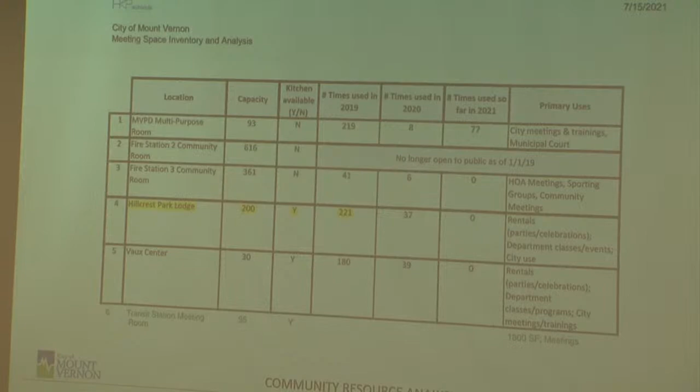We also wanted to make sure we took a look at other kinds of community space that already exists in the city and make sure that we're not duplicating, but really offering another size space. And this will actually be 3 spaces. There's 2 individual rooms and then one that opens up to each other, with a goal of trying to seat 200 people for a luncheon or dinner, and then the ability to have some overflow space out into a commons area, so it could even grow from there. So really the closest thing right now is Hillcrest Park Lodge at about 200. The transit station is 95, so it's about half the size that we're talking about. So it just gives you an idea of the spaces that exist and making sure that we've got something that's new and different and is going to meet the needs of the community. Plus it's bringing them downtown where we really want activity to happen.

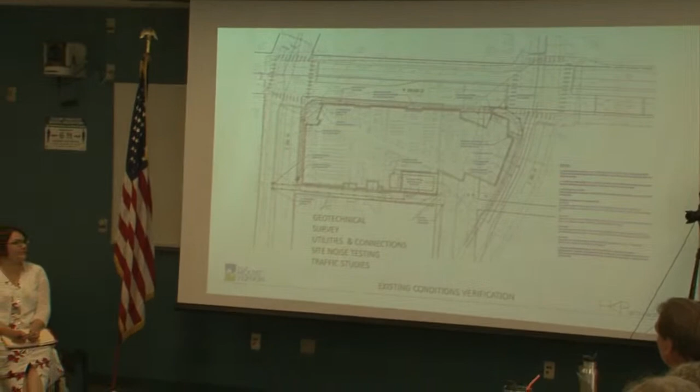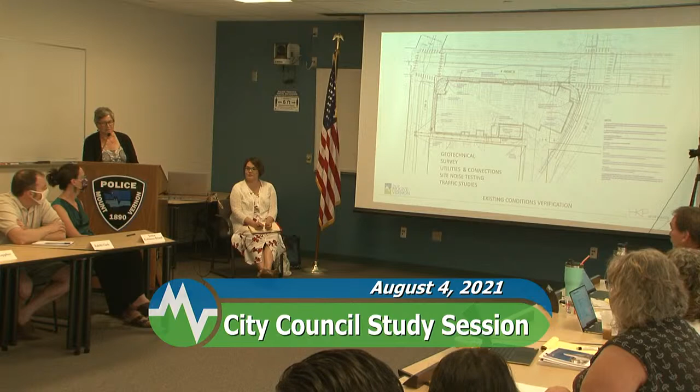We also started with a lot of existing conditions verification. So looking at all of the utilities that are on site. The geotechnical report, we just got the first draft of that. They did their work. We've got a survey as of a couple days ago. They've completed all of their work to date. And we actually even did a site noise test to kind of get a baseline of what the noise is in that area, so that we can look at our envelope and make sure that we're trying to reduce as much noise inside to outside. And we've been working with TSI and the city staff to go and make sure that the way we're envisioning the vehicular and pedestrian circulation around the building is conducive to the site and also all of the other planning that's been done in the sub-area plan.

We've also been looking at the site context. We happen to have a model of the courthouse and Skagit admin building from back in the day when that was completed, so we have a really easy scale model to put this new building next to and start to think about its mass and size and how we can break that down and make it fit within the context. It's not easy because we're really limited in size of sites, so we are pushing the boundaries, but looking at ways to make that happen.

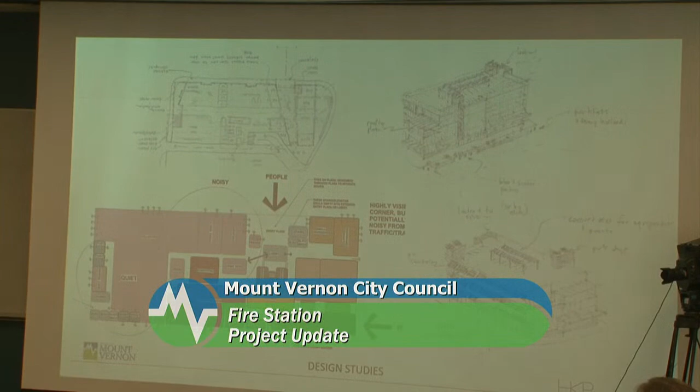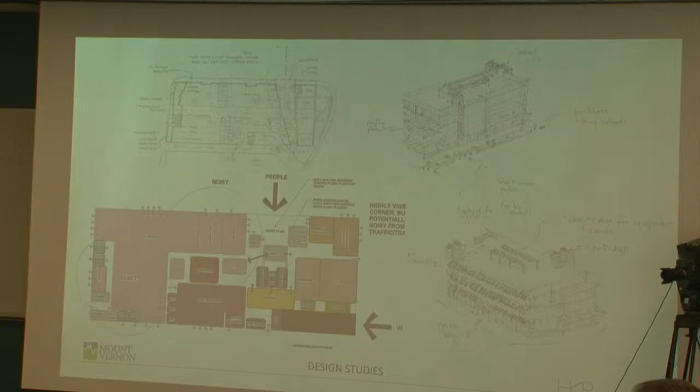We just started with early design studies, looking at plan options, elevational options, adjacency diagrams, and all of those kinds of things, and working with our entire consultant team to provide a plan that was going to work.

So on the 19th of July, we submitted our 50% schematic design set to the city. This was really the first opportunity to get ink on paper, a plan that people could react to, and all of the other consultants working off that plan to look at lighting and power, fire sprinkler, structural, civil—everybody had their own package in this, including wayfinding and signage, and even down to the furniture, preliminary furniture counts.

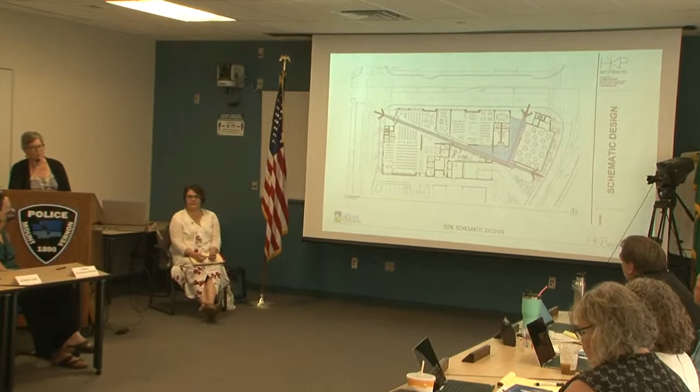The plan presented in this schematic design set was really based around looking at how people flow, pedestrians primarily, into this building from 3 primary sides, and trying to create a circulation pattern inside the building that makes sense. So once you get in the building, it's clear where you are and where the opportunities are for you to move, and to really take advantage of the combination space in the middle as the knuckle that serves a lot of different functions.

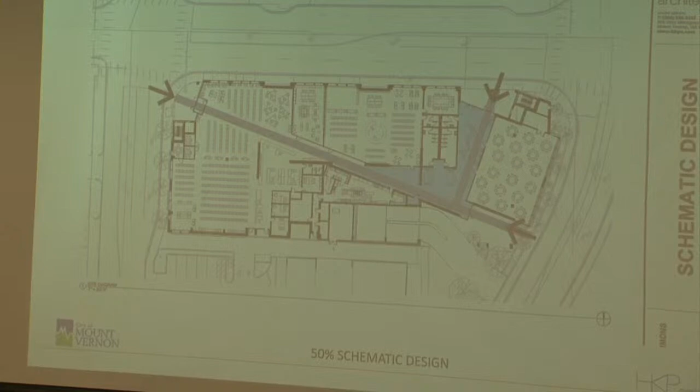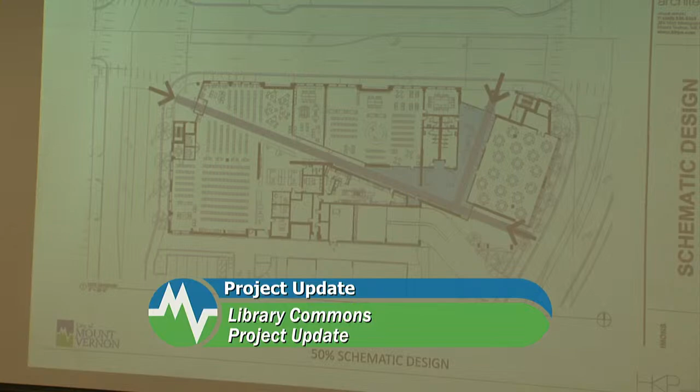I think this space, people may look at it and say it looks like wasted circulation space, but that space, I think, for us is a highly programmed area that will be utilized an awful lot, and we can get into some of those details in a bit. But conceptually, we've got the library on the left-hand side, community center on the right, and we wanted to develop a real clear circulation pattern through the building.

In terms of the site relationships, the one thing we really wanted to focus on was the safest, quickest, and most effective way to get people off the street and out of their cars. So we looked at a pattern where the cars turn onto 3rd primarily, or come up 3rd, and enter the building from the alley off of 3rd. We really want to get them off the street and not come around and cross over multiple pedestrian paths.

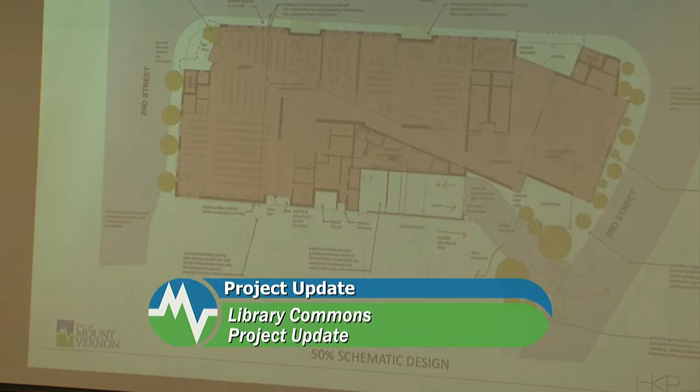Also, we wanted it to be clear—you'll be able to see this really from I-5, so the minute you get off the exit, you'll know exactly where to go, and we won't need to rely on a lot of signage. It'll be quite evident. So that entryway is being studied along with the alley, which we do need for a lot of servicing of the building, and also to maintain all of the property access for the properties to the south, as well as recycling, waste, deliveries, and all those kinds of things.

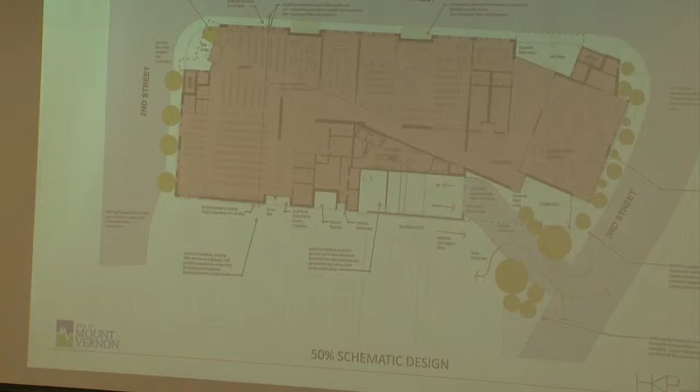We're also trying to pack some landscaping onto the site. It's pretty tight, but we're creating some spaces, and though it's not shown here, there'll be street trees along Kincaid Street, trying to make that the gateway to the waterfront, and soften the building edge to have a nice, pleasant building environment on all 4 sides, even the alley.

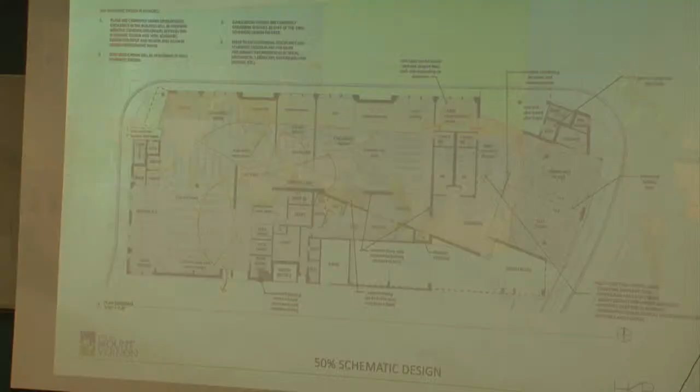The interior plan is really focused on sight lines and visibility and being able to supervise the library spaces as well as the community center. So we looked at, even though we have large shear walls that come down all the way through the parking garage and can't really move, we're trying to find those spaces where we can set staff up so that they have maximum supervision of all of the spaces and not have to rely on cameras or things like that.

Similarly with the community space, there's an option or a space for a staff person to sit in the commons area, but we don't want to dedicate an entire office or dedicated space out there that may not be staffed all the time. Instead, we want a designated space for them, a furniture solution that works and can be flexible, which people could also use as a bar or informational area for different events when they get set up in that space.

So we've got the restrooms here centrally located. The kitchen, I don't have a pointer with me, I apologize, is down in the central lower area as a central space. And you'll see in a minute that we've shifted a few of these things around.

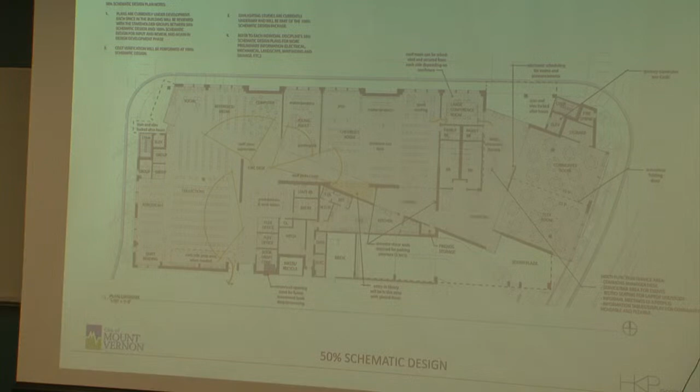Primarily, the idea was to also introduce as much natural daylight as possible, and you can see most of the walls go north-south, so that we can drive light down as far as we can into the building.

Another focus is looking at how to close the building down after hours. So either for the library, if the library wants to stay open but they don't want to have the community center open, or vice versa, how can we make sure the restrooms are available on either side for either function?

And then there's been some thought put around pandemic, coronavirus type of situations with entryways that are separated and different ways to deal with curbside pickup and sanitation of fixtures and things like that.

We have the 2 circulation towers at either side, similar to the previous study. Those are open to the public. They will be closed off with security gates, but they basically work outside of the building footprint. So people can come and go from the garage and then enter the building. They don't have to go through the building to get out to the sidewalk, but they can be closed for security purposes.

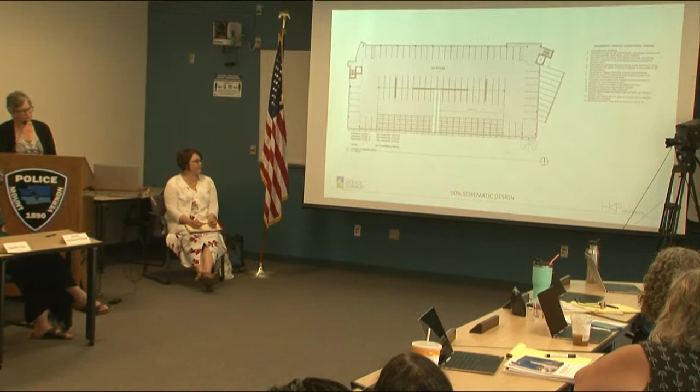And then the parking analysis has been very thorough. We've gone through a lot of different iterations, different sizes, different configurations, trying to optimize as much as possible. Right now, it's 277 parking stalls on the 3 floors. There is an ADA van stall and ADA regular parking on the 1st floor, up near the elevator on the west side, so there's lots of equity within the parking garage.

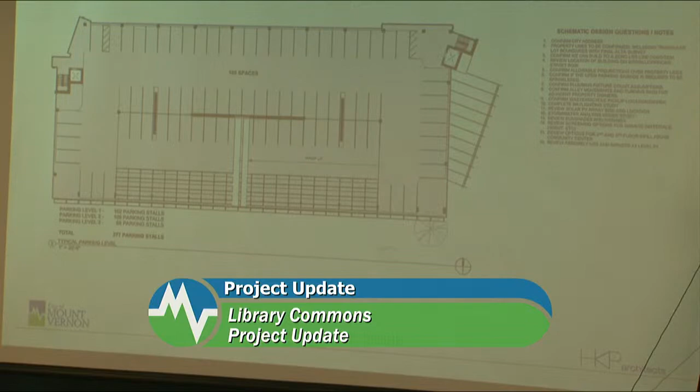There will be spaces for a minimum of 75 EV charging stations. There'll be some EV for electric bikes, and there'll be motorcycle parking. And the top floor maybe has the potential to have a little bit more compact parking if it's opened up for valet or permit spaces for people that live downtown. The beauty of that too is we could stripe it normally, and then monitor it and wouldn't have to restripe it necessarily. But if we know who the users are, we can have it more efficient up there than it is currently striped.

So we developed some very preliminary massing models that went along with this plan, trying to look at breaking the scale down a little bit, especially at the corners, and just starting to get into materiality and things like that.

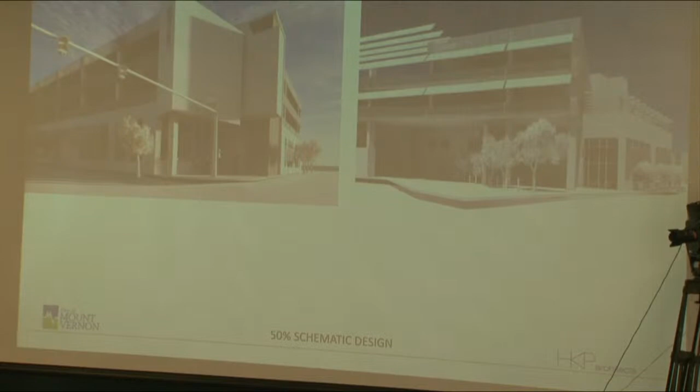Looking at PV panels on the south side, both on the elevation of the building and up on the parking garage floor, and making sure that we have clear marquees and signage for each of the entries. And then lots of visibility, not only for people to be able to see the activities going on inside, but for people inside to be able to see what's going on outside.

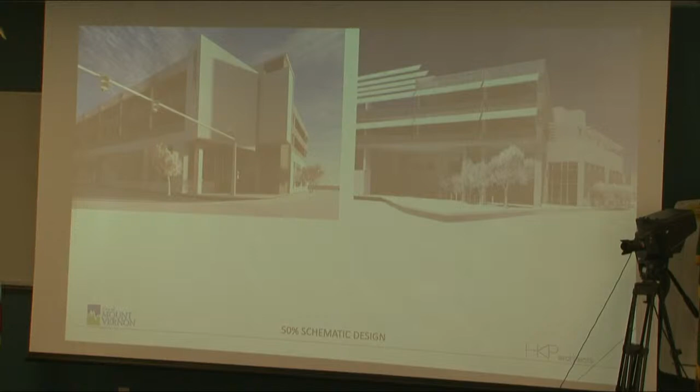Another thing we've been looking at are our sustainability targets, very important for this project. The first one is called the EUI, which is our energy use intensity. Down on the bottom, this is a chart that represents existing buildings. So for a library or public assembly, you would expect to see about a 67 for an EUI, which might be about what the existing library is, or maybe not quite as good with the glazing that's still single pane. I'm not sure if it's been changed out or not.

We are targeting 35, and code building is about 47. So we're trying to really drive down the EUI primarily by the use of a passive house envelope, which is a high-performance, highly insulated envelope that reduces a lot of heat gain and heat loss through the thermal envelope. It's one way it's really going to simplify our mechanical systems, make it more comfortable, more acoustically sound, and provide durability for the life of the building.

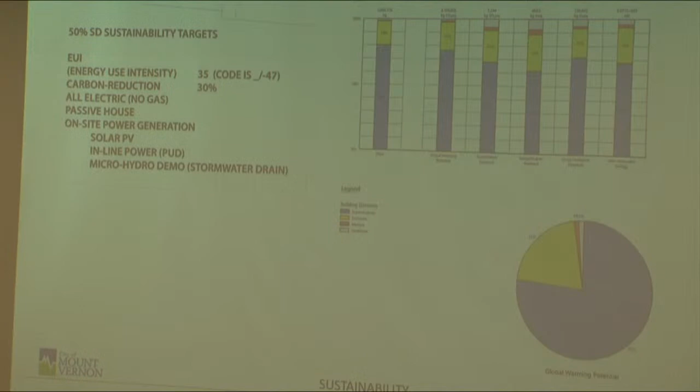The other thing we're looking at: the $2 million from the state came with a string attached, that it be LEED certified. We've put in a request that the LEED requirement be, exemption I think is the word, based on the fact that in our opinion we're going beyond LEED. Bill Bullock has been helping on this. We've got a meeting Friday morning with a person at DOC to talk about getting that exemption for the reason we're going beyond.

The important thing is that LEED costs money just to certify. It has nothing to do with what you buy, but it's going to cost $50,000 to $100,000 just to have us do all the documentation. I'd rather put that money in the building and do the things they want you to do for LEED. Hopefully that will be the case. If not, we can satisfy these pretty easily, and I don't have concerns that we can do this. It just takes time and money, and I'd rather put that time and effort into the building.

We've developed an FF&E budget, which is the furniture, fixtures, and equipment, with some preliminary things. This will all go into the soft cost numbers that will be combined with the first estimate I'll talk about. So we're counting up all the chairs, tables, and sofas and developing that cost with some plug numbers, and looking at all the other impact fees and other soft costs associated with the project.

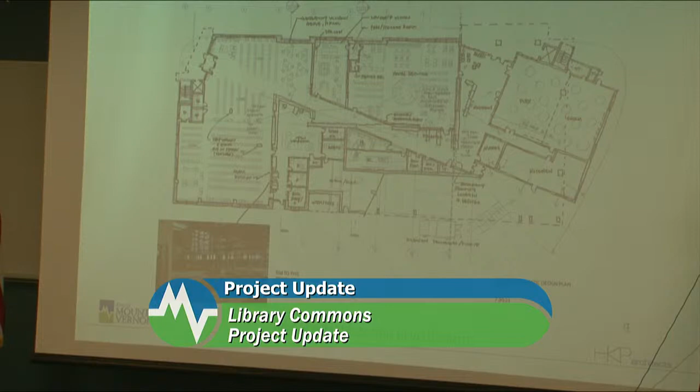From the 50% SD set, we received comments back from the mayor, city staff, library staff, and parks people, and we're in the process of revising the plan based on those comments. One thing you'll notice is the kitchen has moved down to the lower right-hand corner, where it can be visible from the street and have direct access from the south courtyard, putting eyes on that courtyard so we can supervise it. The restrooms have moved into the central area, a bit more adjacent to the library.

We're looking at rotating the conference area while still being able to provide for at least 200 people seated. The kitchen there also helps serve those rooms a lot easier.

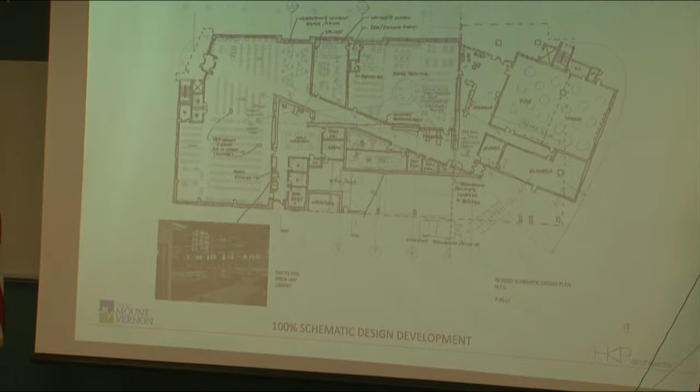There's more direct access. Julie, where's the restrooms? I'm not seeing it. Right, yeah, this whole bank here. Okay.

So there are some gender neutral family restrooms and the men's and women's restrooms there, and a little storage room for friends.

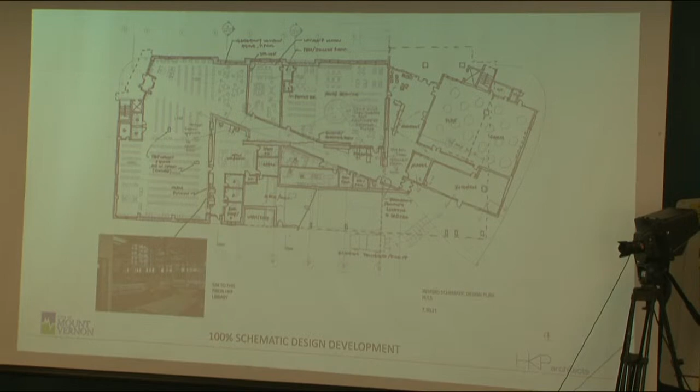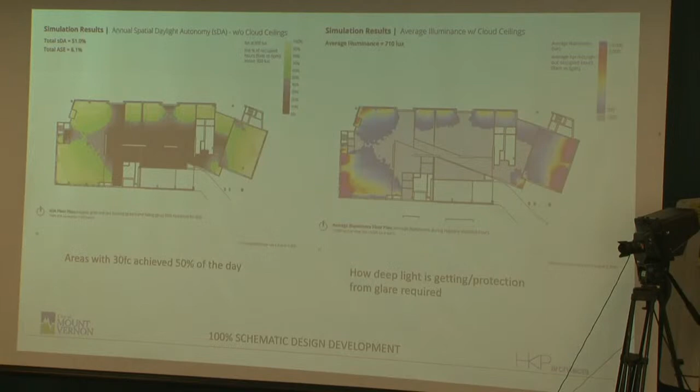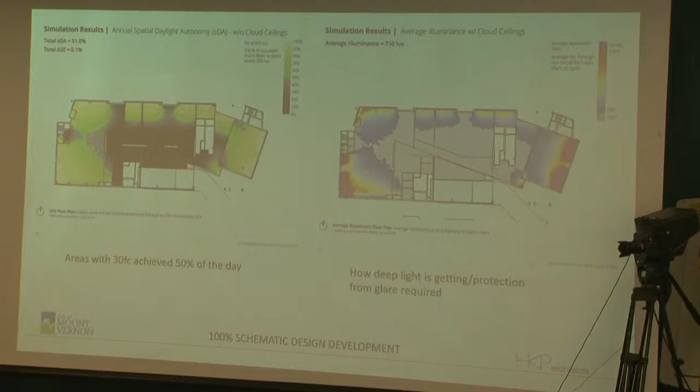We've also been doing daylighting studies with the Integrated Design Lab. This first chart shows where there's 30-foot candles of light achieved 50% of the day, just from natural light. It helps us look at where our walls are, where our rooms are, where we need to drive light. The next one looks at illuminance, the intensity of light, which helps us look at where we might want exterior shading and other ways of bringing in light in different areas. So we're really working three-dimensionally through the natural light patterns here.

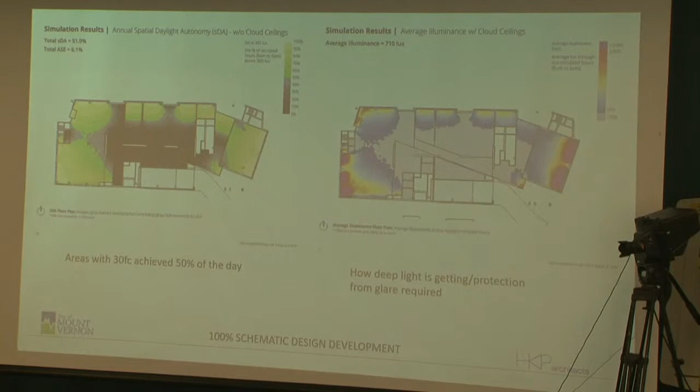So the model is developing. We're starting to look again at materiality, form, and how this feels on the street, and how it's going to feel to both pedestrians and people who are driving here for the first time.

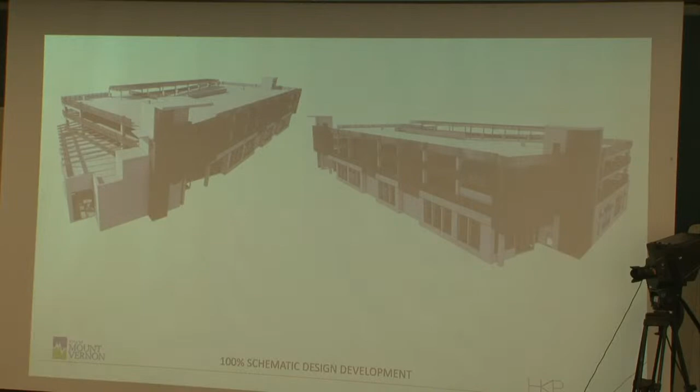The next deliverable for us is 100% schematic design on September 8th, and that will include the first round of costing.

I've also been working a bit with the city on funding, helping with some information on the RAISE grant that went in recently, which the mayor submitted. I've been tracking that along with the city, and at that next deliverable we'll have an update on the complete fundraising package to date. Related to that, we helped assist with a funding video that Brand Query did under our contract. This was geared towards two different audiences, the federal grant opportunities as well as local fundraising, so they'll be developing two different campaigns to help raise money for the project.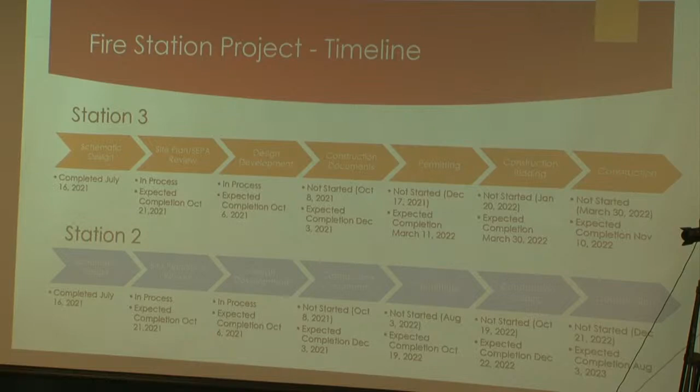So the next thing I wanted to talk about — I don't know if you can see that well enough, but I had that in your handout packet from before, so I'll direct you to that. It might be easier to read. I have that in there more just as a visual aid of things to talk about.

When we were going through this project and started the needs assessment way back in 2018, there was this little thing called COVID that we had not anticipated being around. I'll say good and bad — what COVID did is it opened our eyes to something we weren't really looking at, and now we're thinking of things a little differently from the fire safety perspective.

We had designed our stations with some of those decon corridors and those clean zones and dirty zones, thinking about the contaminants from fires. But maybe we weren't thinking about how that plays out inside the workspace, inside that green zone, where the firefighters spend a lot of their time — in those offices, living spaces, kitchens.

So with that, when we engaged Mackenzie, we brought forward some ideas about how we can add to increased safety, and we've kind of titled those the COVID items. So that handout I provided to you covers those COVID items and the cost associated with some of those, and that is the HVAC system.

One of the big costs, and if you think about it in context — the efficient way to do a system is you have an air conditioner, an HVAC system, and all this ducting, and it puts out the air and circulates it everywhere. The problem is the intake and where that air circulates crosses rooms, crosses barriers and so forth. So if you're trying to protect folks, you really want to compartmentalize that.

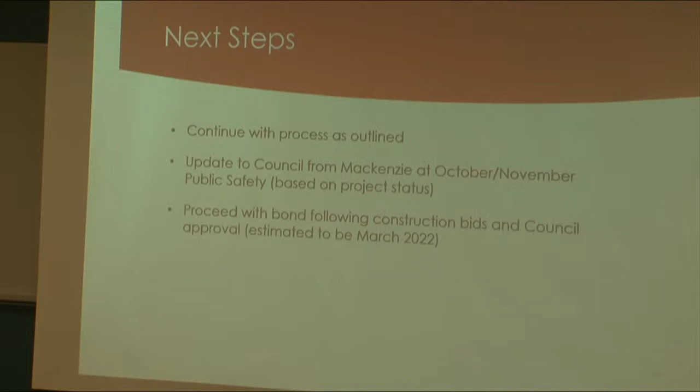I'd just like to say, Chief, I appreciate the transparency on it, and the work you've done. We've met a couple times, Councilmember Hudson's met with you, it's been a good experience and very transparent, I think everybody knows exactly what's going on. I appreciate that, working with council on that. That's our goal. All right, thank you.

I'm glad we voted to take over EMS. It found us a very good funding source. That was a brilliant move. Only took 15 years—who agreed to do this? Better late than never. All right.

Thank you, Chief Price. Is there anything under the good of the order? Hearing none, I would ask the city attorney if there's a need for an executive session.

We do need to enter into an executive session with the mayor and city council for 30 minutes to discuss with legal counsel matters relating to litigation, potential litigation, or enforcement actions to which the city, the governing body, or a member acting in their official capacity is or is likely to become a party, when public knowledge regarding such discussion would likely result in adverse legal or financial consequence to the city. 30 minutes, we would end at approximately 7:50. This would be pursuant to RCW 42.30.110 subsection 1(i), and no final action after.

Okay, I would adjourn council into executive session at 7:21.